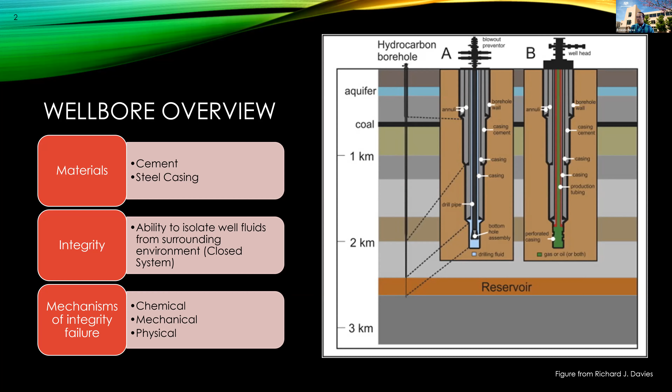So the knowledge gap that I found is that there's an increased need to understand what is going on in these wellbore environments. A lot of the published work deals with the interface between the cement and the formation, and cement fractures themselves, and there's a big gap for the interface between cement and steel. This is less studied, I feel, because it's an overlap of geotechnical and environmental engineering areas. I'm finding a lot of literature on electrochemistry as well as geochemistry.

Hopefully this work can lead to quantitative data that would better calibrate reactive transport models so that we can better assess the environmental impacts of these wellbores. I'm building off previous work done here at UNM a few years ago, which recently published a paper dealing with saline brine in a cement fracture. Moving forward, I'd like to include the steel interface in this knowledge.

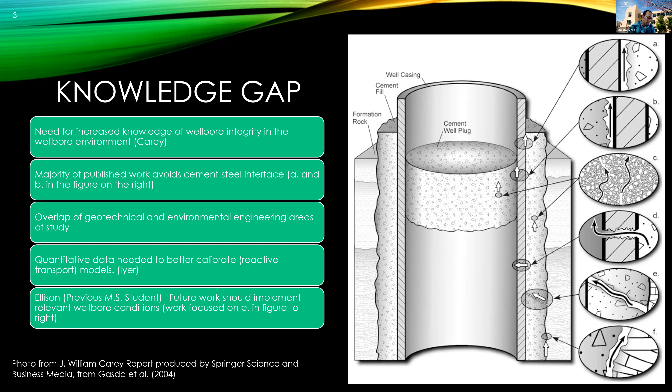So the objective of my work is to determine the effects of saline brine on solubility and the reaction products at this interface, and how those could affect the permeability and mechanical properties of this wellbore system. I'm going to simulate conditions of elevated temperatures and use field sample water from the Permian Basin.

My hypothesis is that the saline brine will be highly reactive at this interface and cause the iron to be oxidized, and possibly other ions in the water to be reduced as well, and then reduce the sulfur. My other hypothesis is that iron precipitates will form on the steel while calcium precipitates will form on the cement.

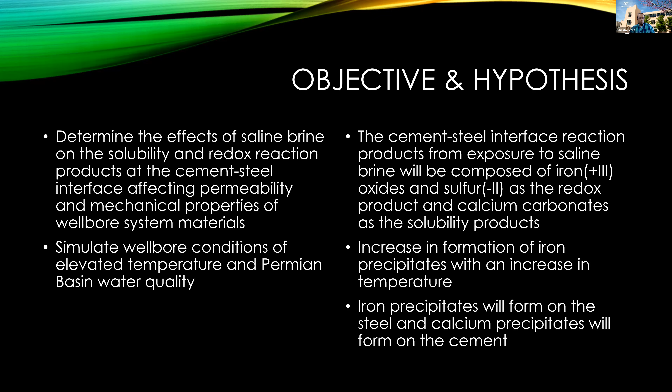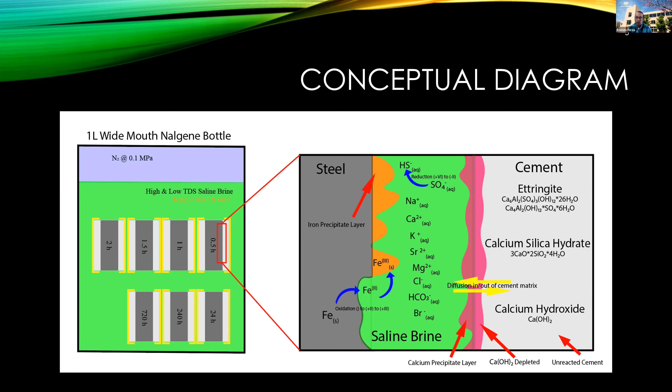So I've been working on this conceptual diagram to help me better understand this research. This is my envisioning of the cement-steel interface. What I've read in literature is that there often exists a flaw, where the steel and cement are actually separated, and that's caused during the production or drilling of the well.

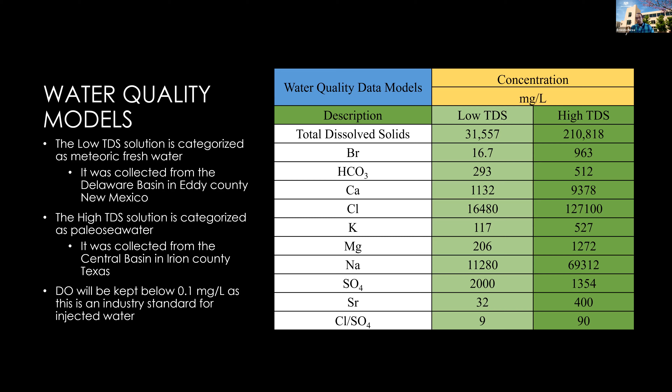So here you can see a few water qualities that we've seen in this area. There's two main water qualities that have been categorized, either paleo seawater or freshwater influx to the formation. I'm still waiting to try and get my field sample water so that I can have a better idea of creating a lab water. Here you can see my experimental approach, quite the layout I've created for myself.

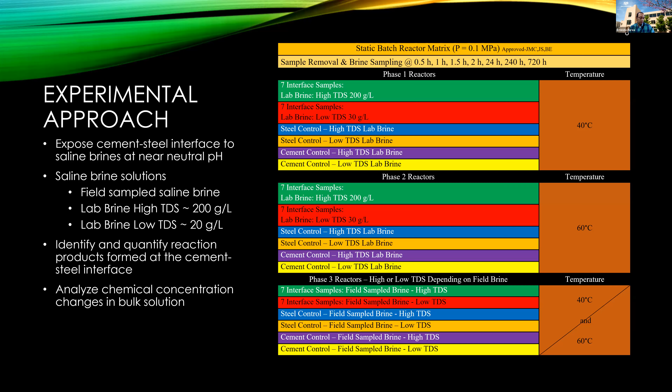So the first thing I've been doing is really trying to figure out how to pour all these samples and create this interface, which has been more difficult than I thought it was going to be. I just pictured myself going in there and making some samples and being done with it. This is a really important step because this curing of the cement itself is trying to get a proper reaction.

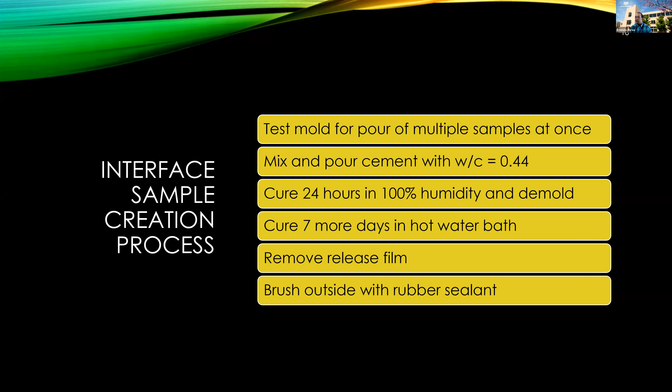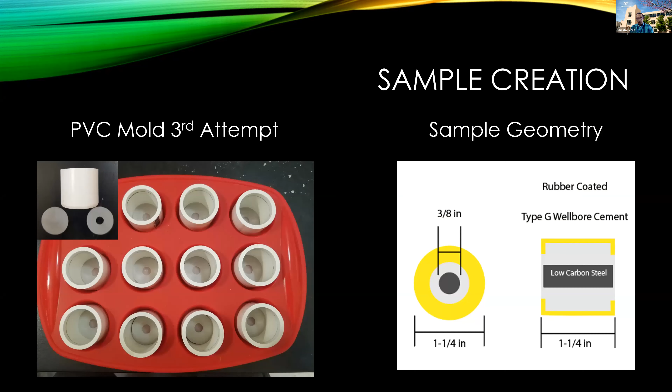So you can see here I'm on my third mold that I've created. I had two other molds that didn't work out so well. You can see that these are the sample geometries I'm hoping to create. Here's my control samples. That way I can have this small space reaction with cement only and with steel only.